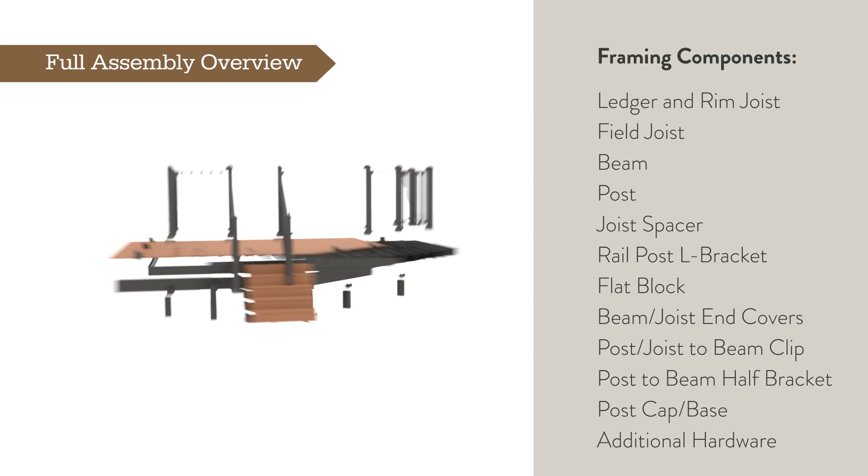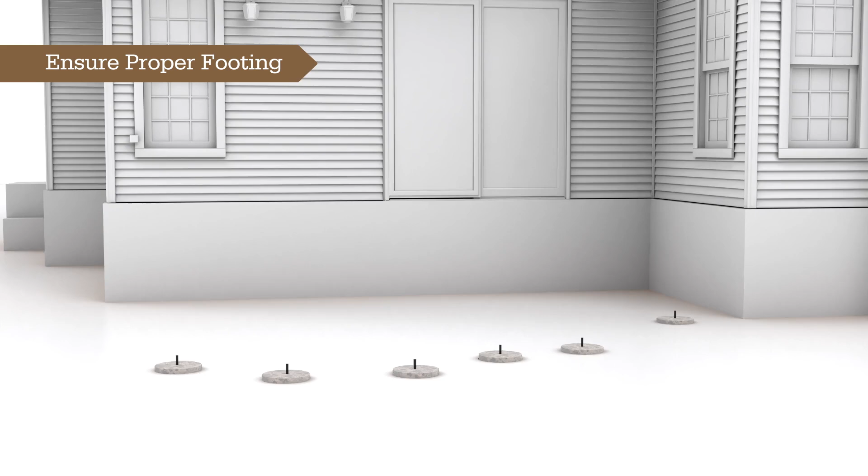A properly installed foundation footing system that is below frost line and meets local code requirements is critical to the appearance and performance of TimberTech framing and decking products. Depending on the deck height above grade, and especially in close-to-grade applications, excavation may be needed, including sloping the finished grade to shed water from the home and deck.

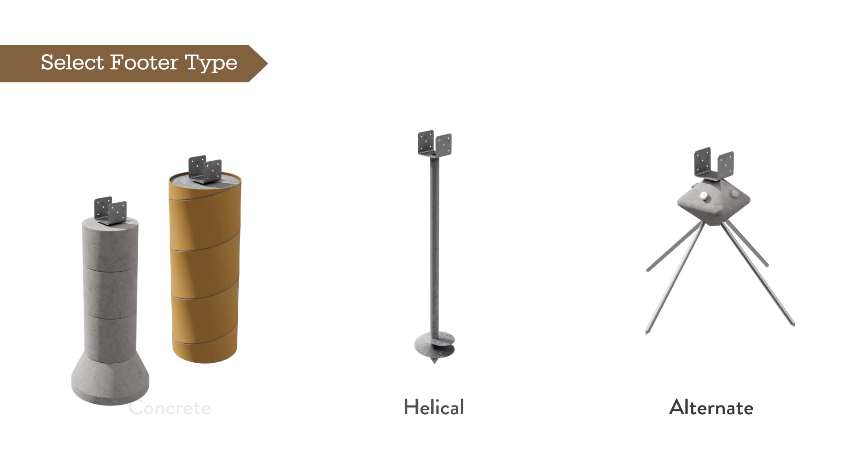Always check with local code authorities for specific footing requirements, including type, size, and depth requirements in your area. Examples of acceptable footing systems include poured concrete footings, precast stackable concrete, helical piles, and alternate type piers.

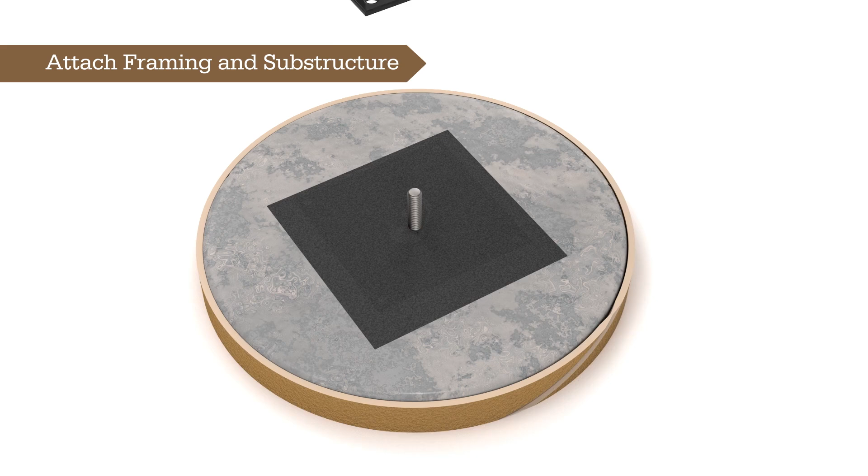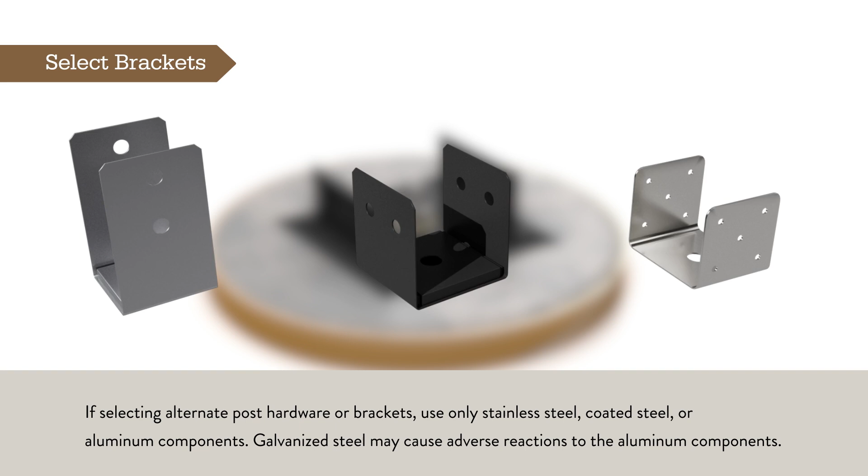Your deck frame or substructure must be securely attached to the foundation to prevent uplift, lateral movement, or shifting of the deck structure. While we do supply post-to-pier brackets, there are many types of connector brackets available on the market to securely attach framing to footings depending on type of footing used, load capacity needed, or other specific requirements.

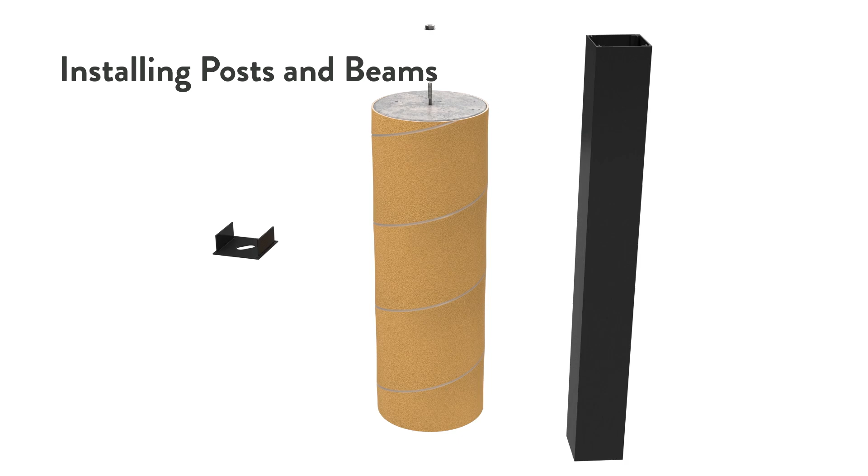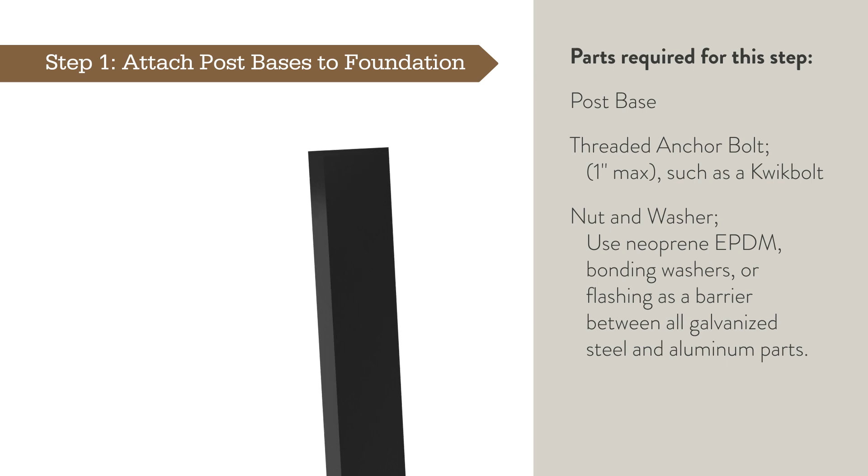Next, we will go over the steps you need to know to successfully install posts and beams for TimberTech aluminum framing. Step 1. Cut your post to the appropriate length, considering that the beam is 11 1/4 inches tall, joists are 7 1/4 inches tall, and composite decking is typically 1 inch tall. Be sure to consider the additional 1/4 inch total height that the post base and post cap will add to your post.

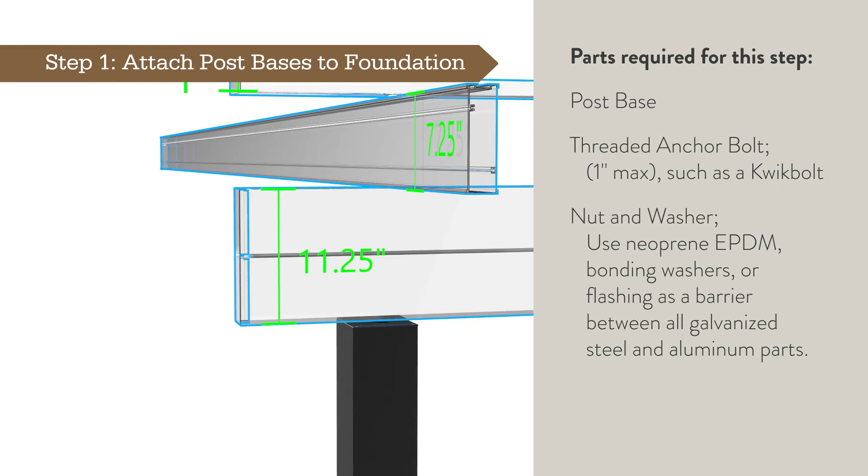Secure post bases to the pre-installed foundation or footing system using a threaded anchor bolt, washer, and nut. Be sure to install a galvanic barrier between any uncoated steel and aluminum contact points. Step 2. Insert post caps. Insert a post cap into each post and install 4 TimberTech AF flathead screws at each countersunk hole.

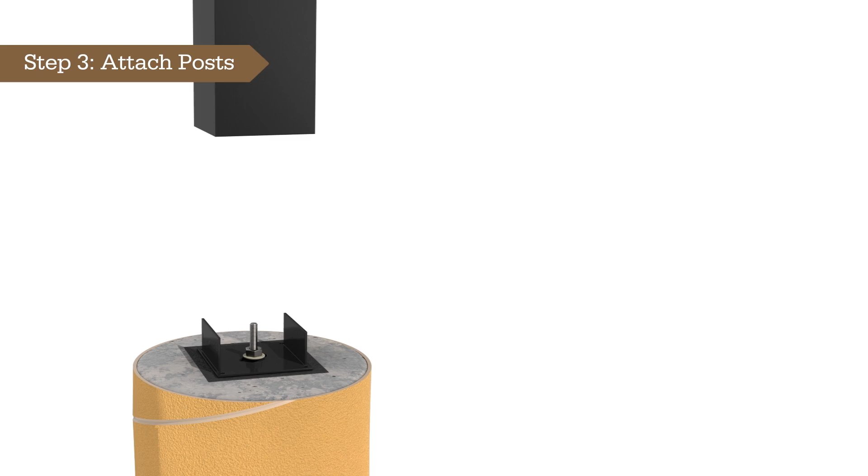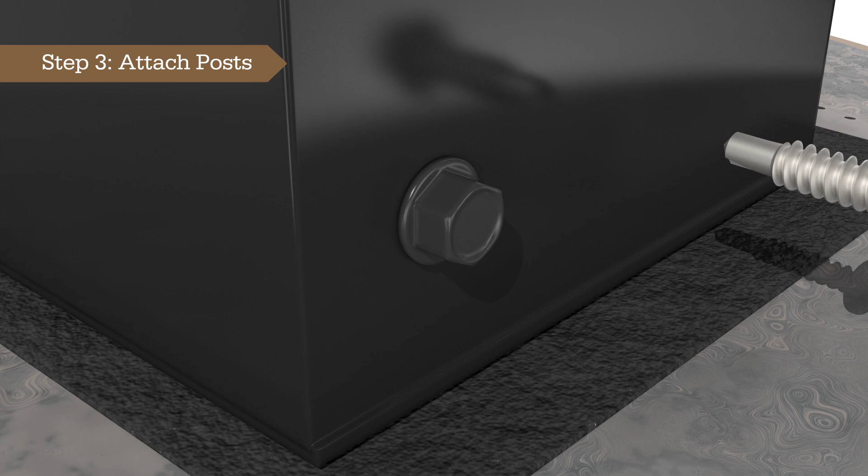Step 3. Attach 5.5 inch by 5.5 inch aluminum posts to each post base. Set each post by sliding the 2-inch post base tabs into the internal post slots. Use 6 TimberTech AF 1/4-20 hex head self-drilling screws to secure each post to the post base, ensuring the screws drill through the post wall and into the 2-inch post base tabs that are hidden inside the post. Check that all posts are level and plumb, making any necessary adjustments prior to proceeding.

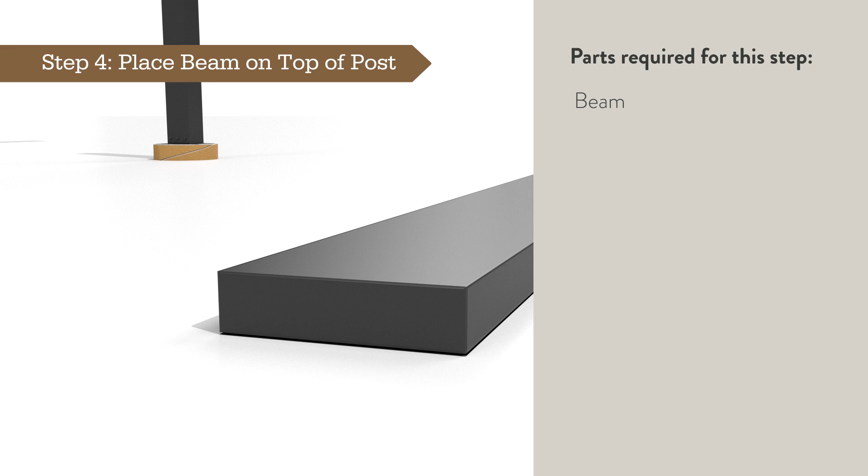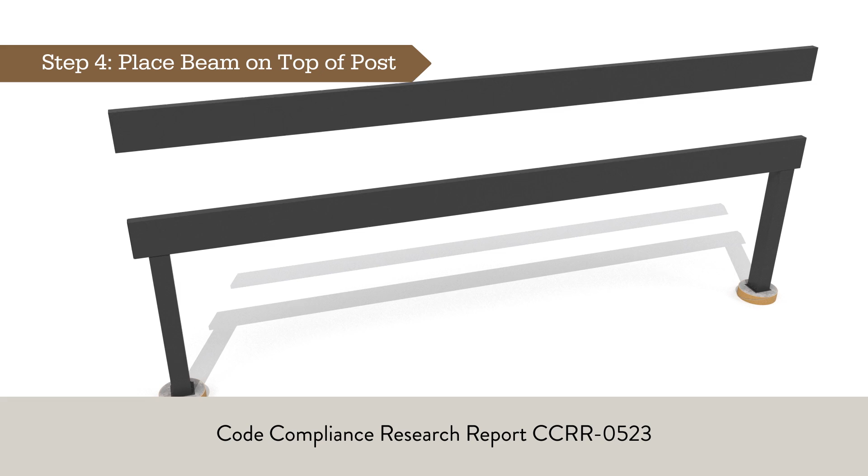Step 4. Place the beam on top of the posts. Carefully set the beam on top of the posts. At least 2 people are needed to safely hold the beam in place prior to fastening. 2 beams may be used to achieve greater spans between the posts. Refer to CCRR-0523 for allowable single beam and double beam spans.

Step 5. Install post-to-beam half brackets. Use TimberTech AF flathead screws to install post-to-beam half brackets on the front side of each beam and post. 2 screws drill into the front of the beam and 2 screws drill into the sides of the post. Ensure the front of the beam is flush with the front edge of the post. For double beam configurations, secure the second beam by installing a post-to-beam half bracket on the back side of the posts.

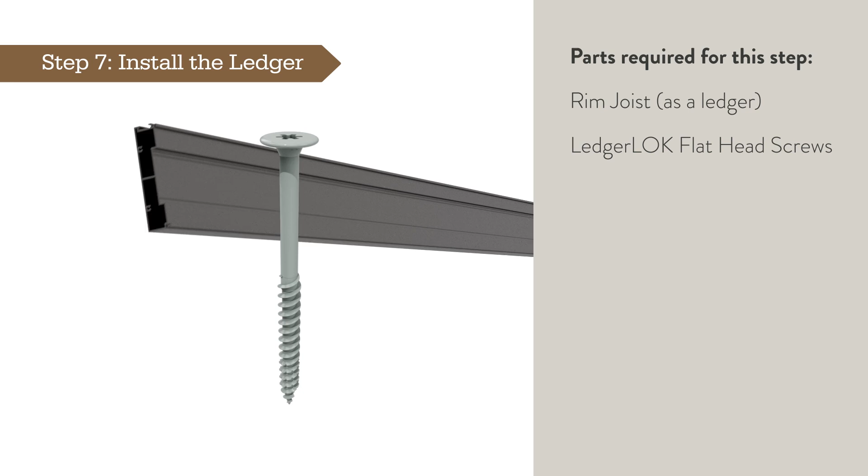Step 6. Install post-to-beam clips. For a single beam configuration, use TimberTech AF hex head screws to install a beam clip on the back side of each beam post connection. 2 screws drill into the post cap and 1 screw drills into the beam. Single beams may share a single post. If splicing a beam, center the splice on the post and install a beam clip on the back side of each beam.

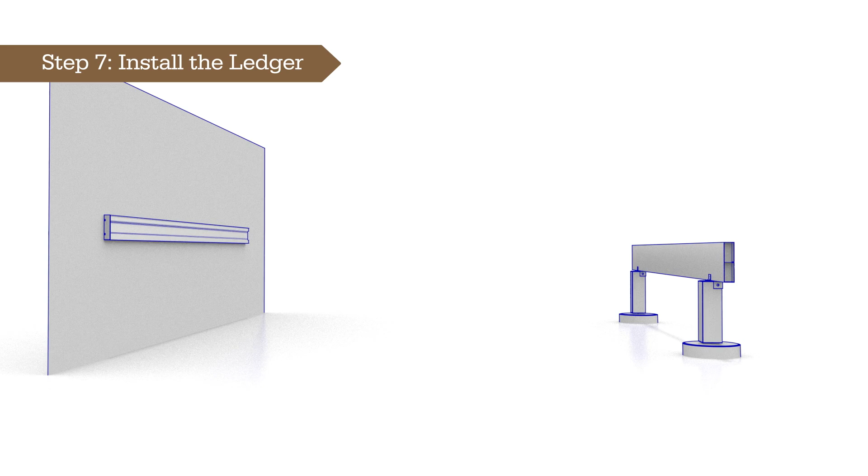Step 7. Install the ledger. Prior to installing the ledger, you must install a waterproofing membrane between the ledger and the house rim board. After the frame is installed, install an additional waterproofing membrane running from the house behind any siding and across the top of the ledger, so that all the water drains in front of the aluminum ledger. The ledger should be installed so that the bottom of the ledger is level and in the same plane as the top of the drop beam.

If your design calls for the frame to slope away from the house, raise the ledger so that the bottom sits slightly higher than the top of the beam. For flush beam installations, the top of the ledger will be in plane with the top of the beam. A slope away from the house can be achieved by slightly raising the ledger.

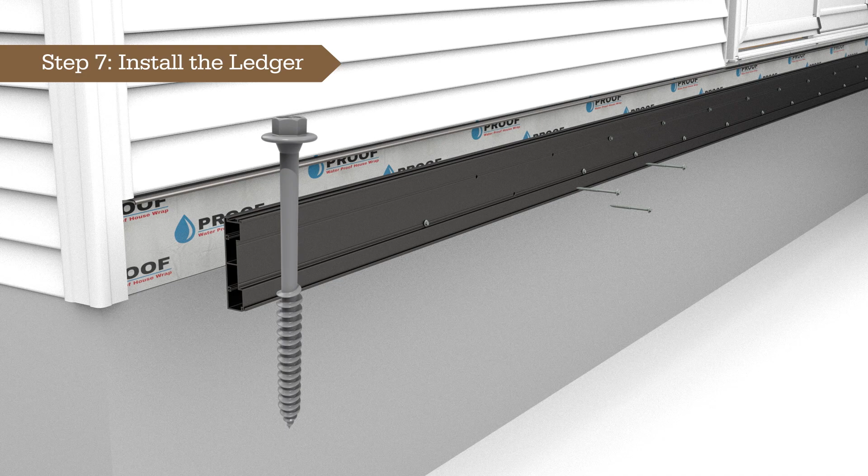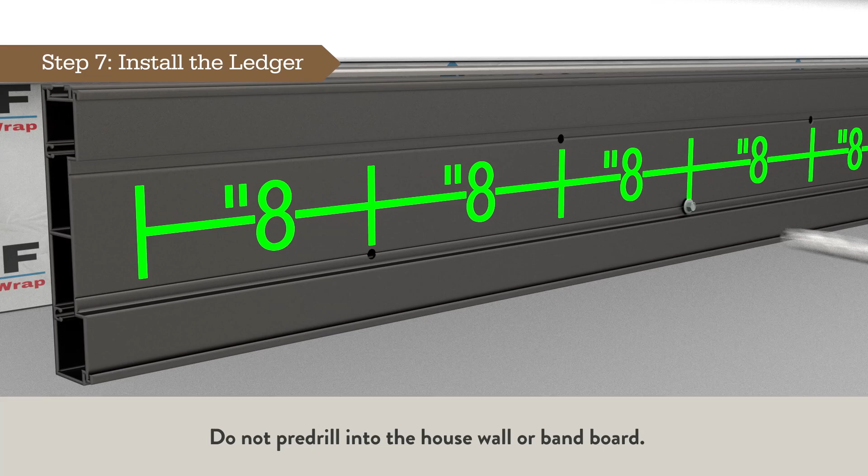You must pre-drill the ledger prior to installing ledger lock fasteners or other approved coated steel anchors. Pre-drill through both walls of the ledger with a 5/16 inch or 3/8 inch drill bit, using the V-notches on the ledger for vertical positioning.

Alternate ledger lock anchors every 8 inches, placing one high and one low across the ledger in a W pattern. Some instances may require 2 screws every 8 inches or a different fastening schedule. Refer to local building code and CCRR-0523 for proper spacing and placement of anchor screws.

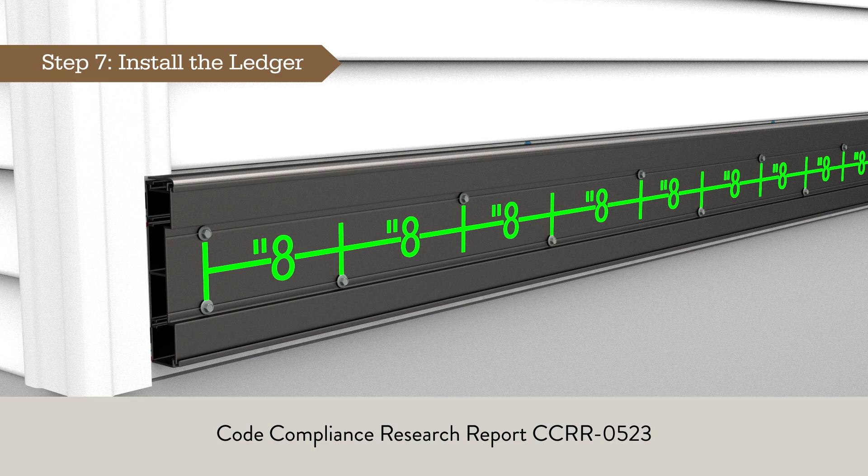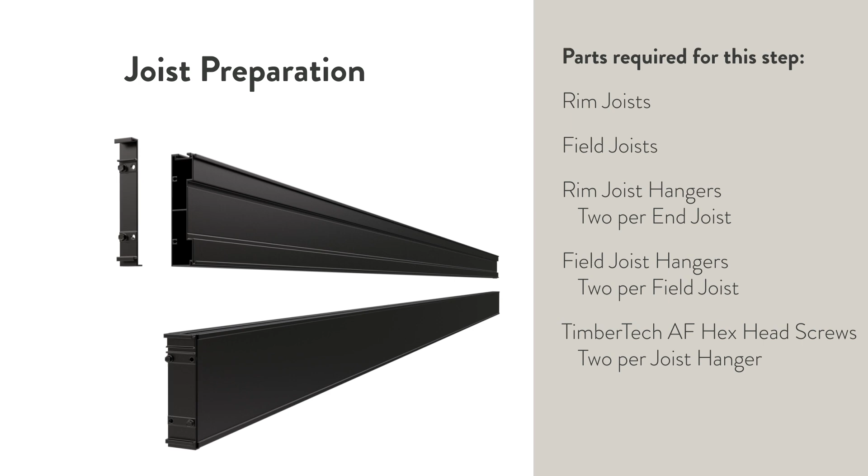Next, we will cover how to prepare and install joists for your TimberTech aluminum framing. You will need rim joists, field joists, rim joist hangers, field joist hangers, and screws. A standard rectangular deck frame requires 4 rim joist components to form the perimeter. The ledger and rim joist are usually cut to the overall frame width. The 2 end joists are cut to the same length as the field joists.

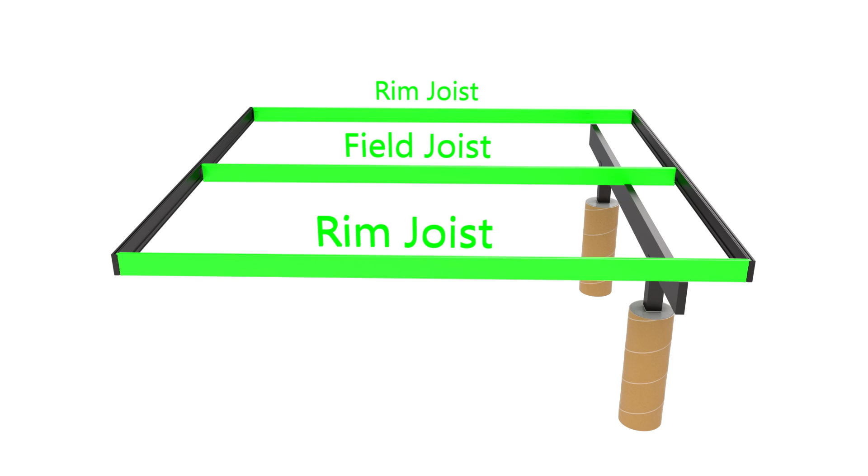The length of the field joists and end joists is determined by taking the overall frame length and subtracting 4 inches, 2 inches for the ledger with joist hangers and 2 inches for the rim joist with joist hangers.

Install rim joist hangers to every end joist and field joist hangers to every field joist, using a joist hanger and 2 TimberTech AF 1/4-20 hex head screws at each joist end. Ensure the 2 hooks are pointed down and that the top of each joist hanger is flush with the top side of the joist.

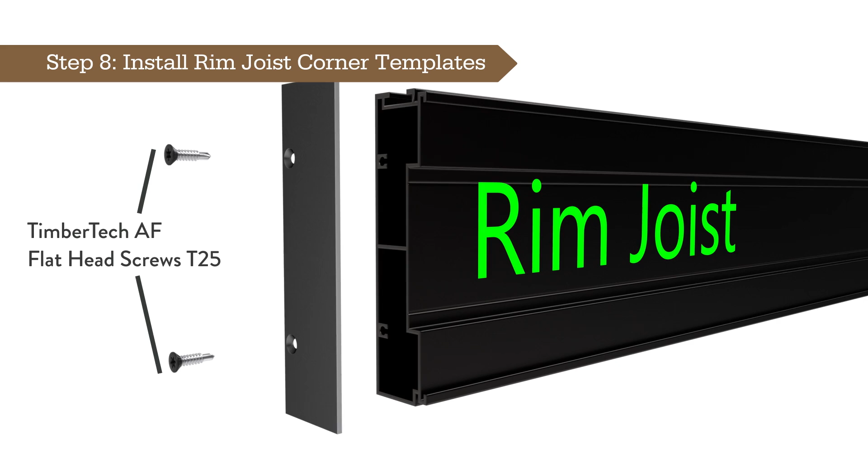Step 8. Install rim joist corner templates at the ends of the ledger and rim joist using 2 TimberTech AF flathead screws for each template. The corner templates can be removed or left in place after the installation is complete.

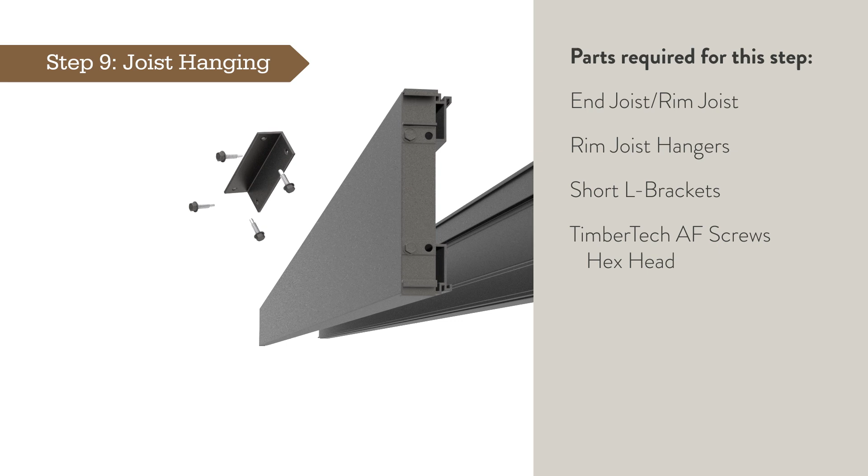Step 9. Install end joists. Hang the end joist between the ledger and rim joist, then secure each corner using 1 short L bracket and 4 TimberTech AF 1/4-20 hex head screws.

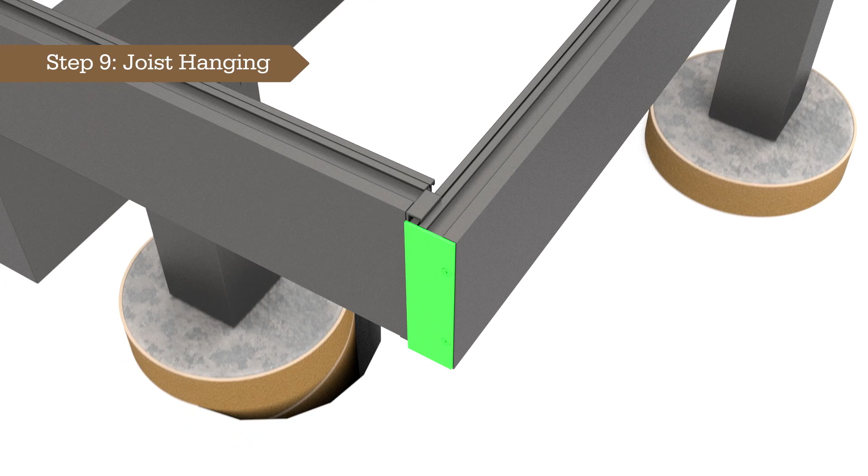Use the rim joist corner template as an alignment tool to ensure the end joists are installed perpendicular and flush with the ends of your ledger and rim joist. The end joist should have rim joist hangers installed prior to installing the short L bracket.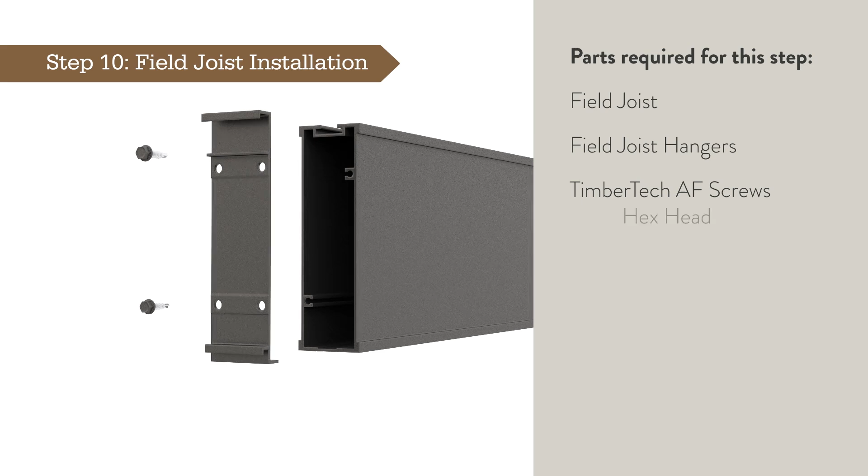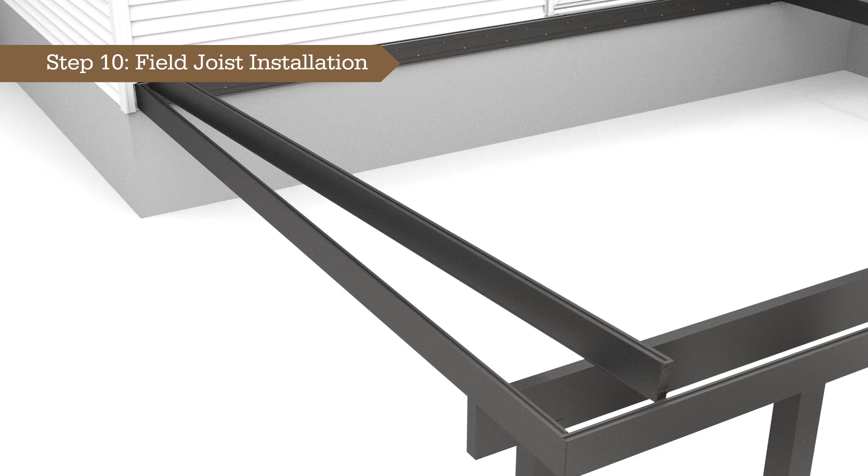Step 10. Hang field joists. Install field joists by hanging them on the ledger and rim joist. This may require rotating the joist about 10 degrees, lowering the joist so it is in plane with the perimeter frame, and then rotating back so the hangers latch on to the ledger and rim joist.

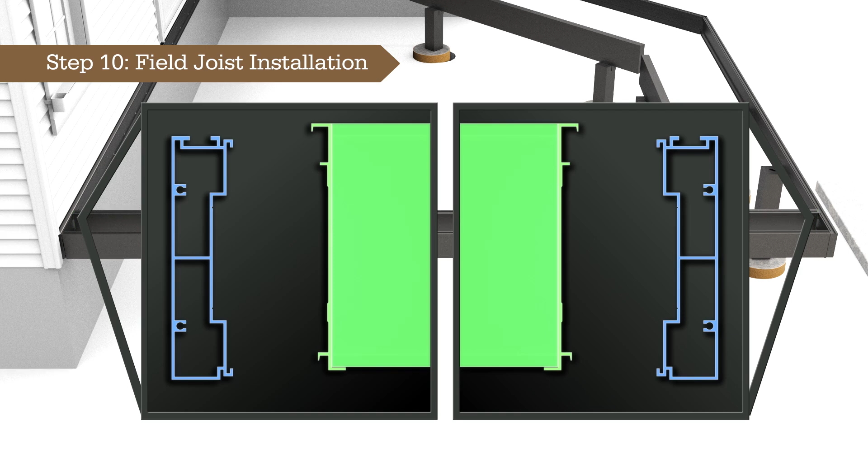Ensure that the top and bottom field joist hanger hooks are fully engaged with the ledger and rim joist. If the joist looks misaligned or out of plane, check that the field joist hanger is properly latched onto the top and bottom hooks on the ledger and rim joist.

Step 11. Install joist spacers and uplift keys. Hang a joist spacer on the ledger and rim joist to set the appropriate joist spacing. Then insert a 2-inch uplift key through the top opening of the joist hanger. This locks the field joist components to the rim joist and prevents vertical uplift forces.

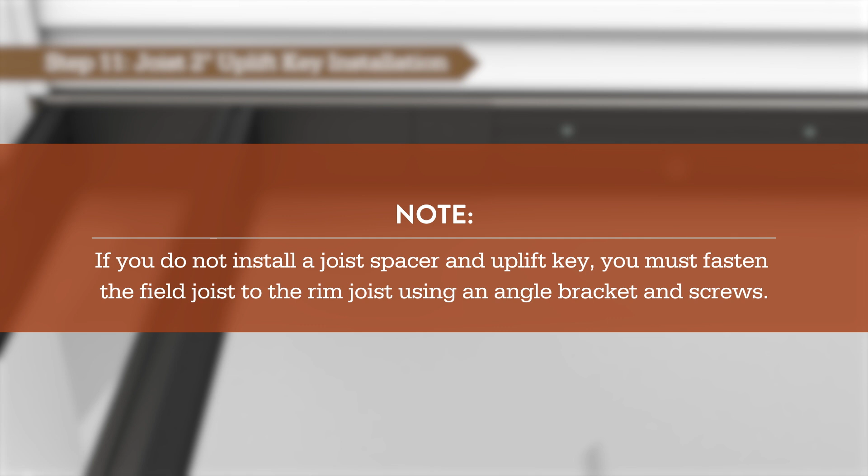It is critical to install a joist spacer on both sides of every joist, as the joist spacers lock in the uplift keys and prevent the joists from moving horizontally along the rim joist track. Joist spacers may be stacked, combined, or cut to smaller widths if the joist spacing is not standard 12-inch or 16-inch on center. If you do not install a joist spacer and uplift key, you must fasten the field joist to the rim joist using an angle bracket and screws.

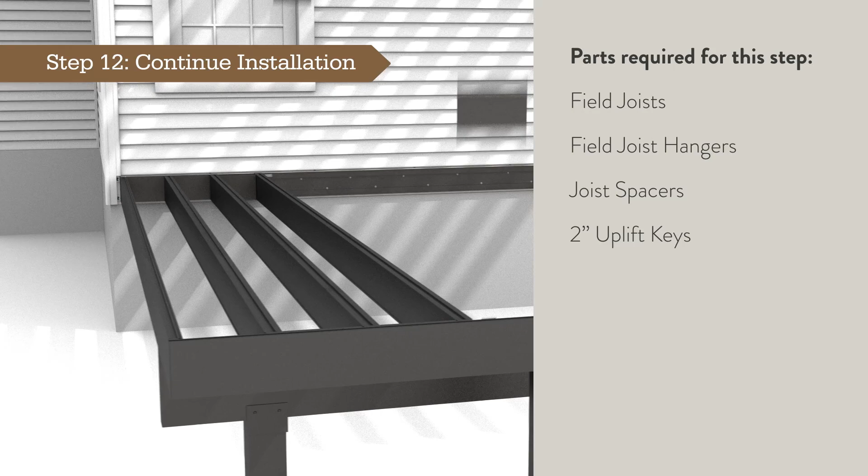For 12-inch on center, use 10-inch joist spacers. For 16-inch on center, use 14-inch joist spacers. Step 12. Continue the installation process. Repeat the previous joist hanging steps, installing field joists, uplift keys, and joist spacers until there is 1 joist remaining.

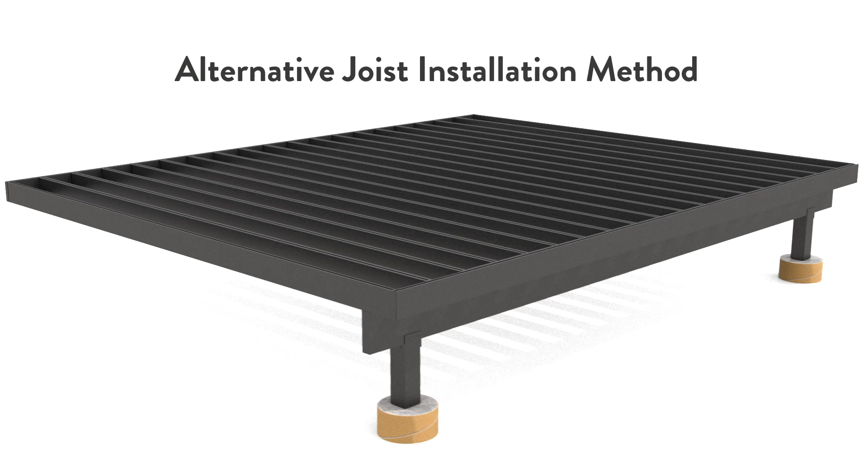An alternate method of installing joists is to use a tall L bracket and 4 TimberTech AF 1/4-20 hex head screws. This method does not require joist spacers and uplift clips.

One common installation practice is to use joist hangers, spacers, and uplift keys to hang joists on the ledger, and then fasten the joist to a flush beam using a tall 90-degree bracket and 4 TimberTech AF hex screws.

Install the last field joist and insert an uplift key. Then, measure the resulting gap between the last field joist and the end joist, accounting for the short L bracket in the corner, and cut your last spacer to the appropriate length. Alternatively, you can use a tall L bracket or short L bracket to secure the last field joist.

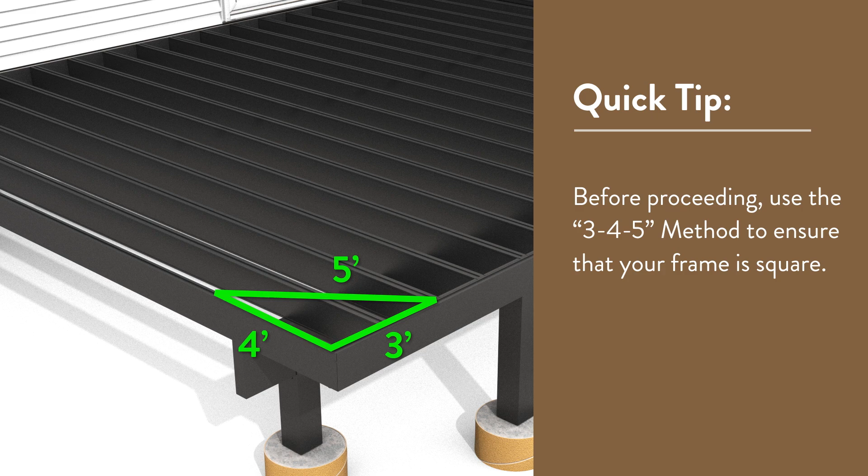In the case of a double beam, center the beam clip over the seam and fasten 1 hex screw into each beam. Step 14. Install optional fascia and rim joist covers. Open rim joist ends can be covered with a rim joist corner template or a rim joist end cover with adhesive caulk. Black is recommended.

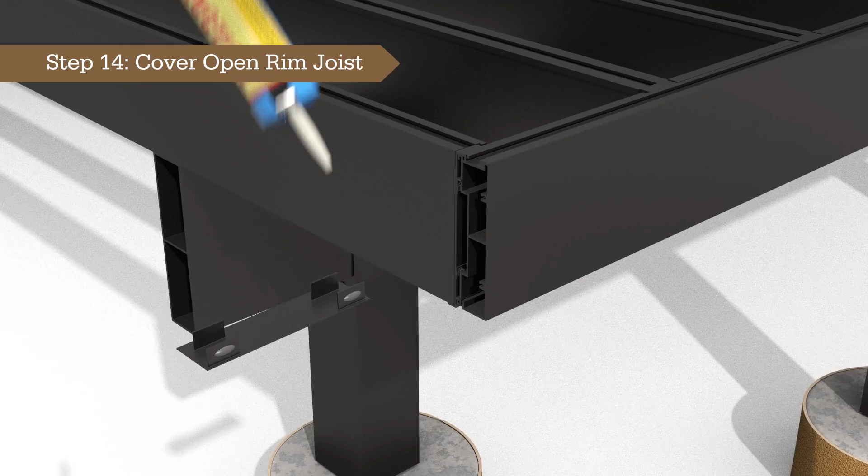The entire perimeter frame can be covered with a 7 1/4 inch PVC riser board or deck board or PVC trim, all of which can be fastened with Cortex driller screws and plugs. Composite fascia is not compatible with aluminum framing.

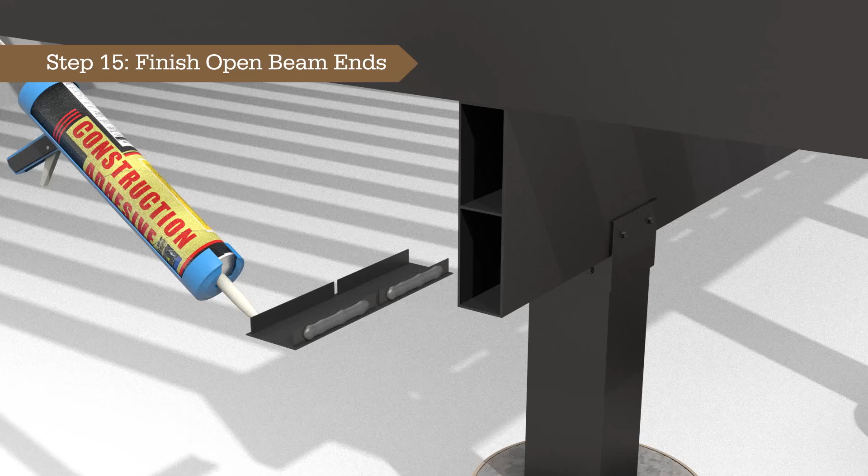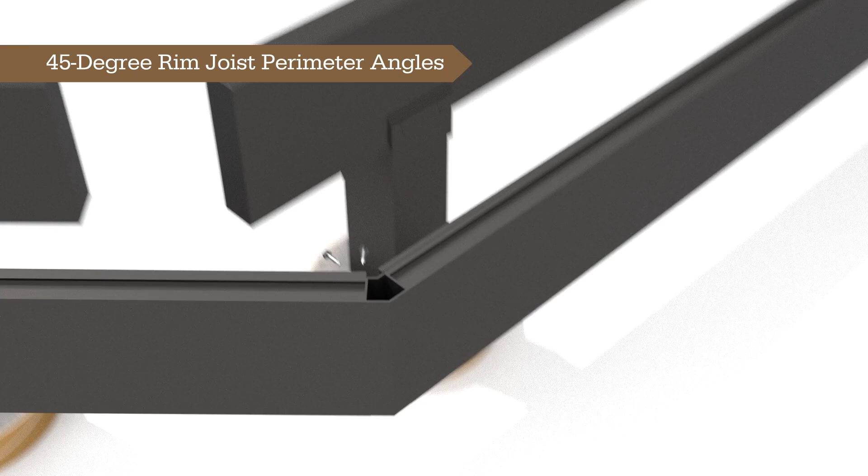Step 15. Finish open beam ends. The open beam ends can be covered with a beam cover using adhesive caulk. Black is recommended. When installing 45-degree rim joist perimeter angles using the 135-degree angle bracket, consider the following. Rim joists do not need to be miter cut, as the 135-degree angle bracket forms the 45-degree corner.

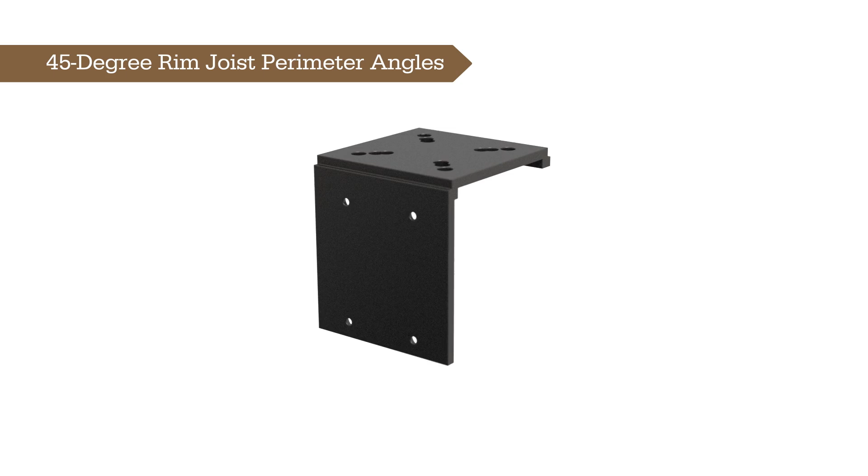When installing railing at the 45-degree corner, you may need to cut the rail post L bracket and drill new bolt holes so that the rail post can be installed at the correct angle. Refer to specific railing instructions for proper rail post placement at 45-degree corners.

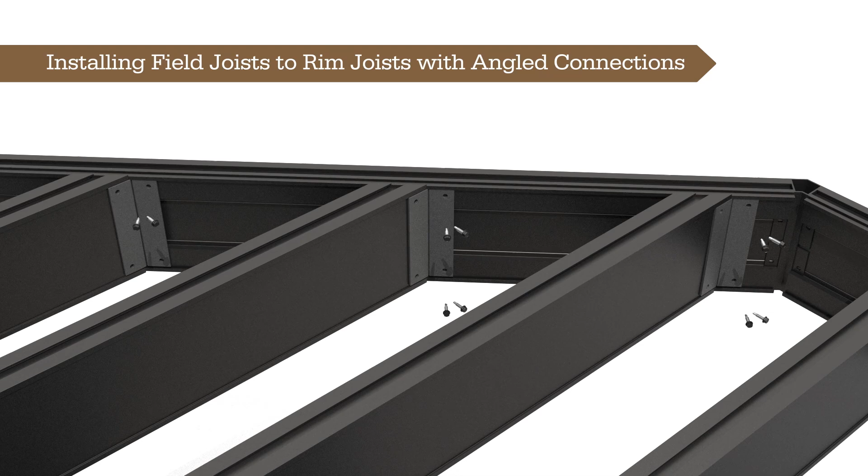When installing field joist to rim joist with angled connections using the adjustable angle bracket, the following tips should be applied. The adjustable angle bracket is a flat plate with a V-notch. Using vice grips, bend the bracket to the proper angle, but do not overbend or bend past 100 degrees. Only bend the bracket once. Bending the bracket back and forth will cause the bracket to break at the V-notch.

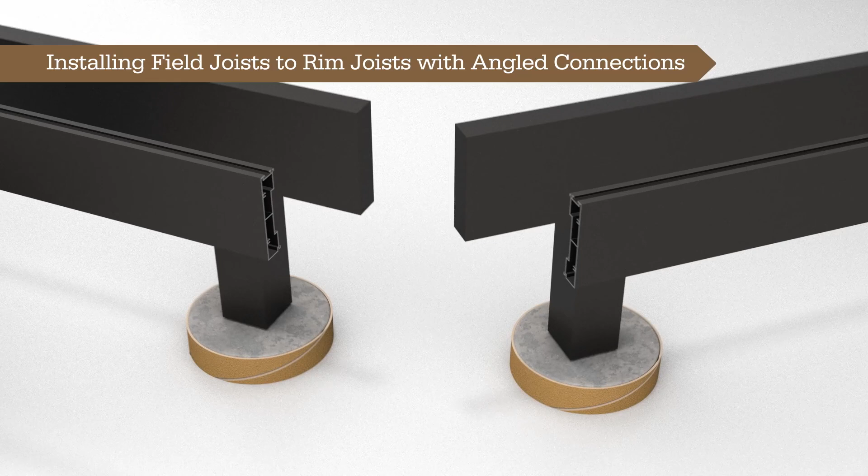When connecting field joist to rim joist at an angle, the field joist must be angle cut, and the adjustable angle can only be installed at the obtuse angle. When installing 2 rim joists with the adjustable angle brackets, you may want to angle both rim joists to create a mitered outside corner. There are a few ways to design your frame to support a picture frame deck border.

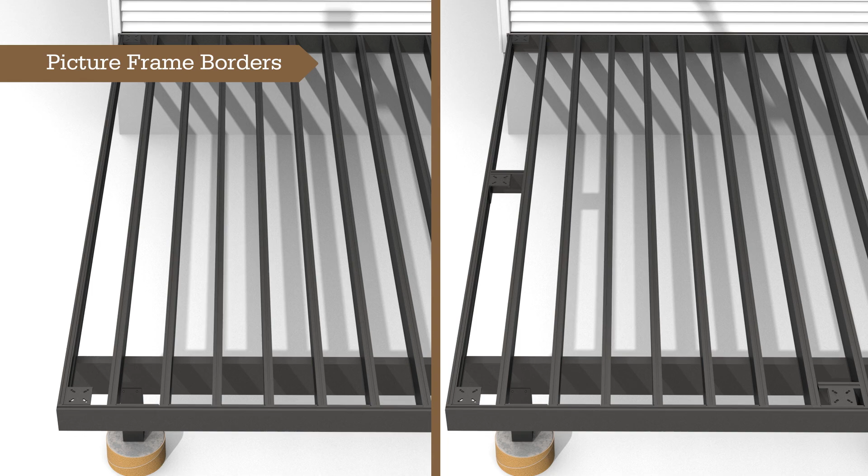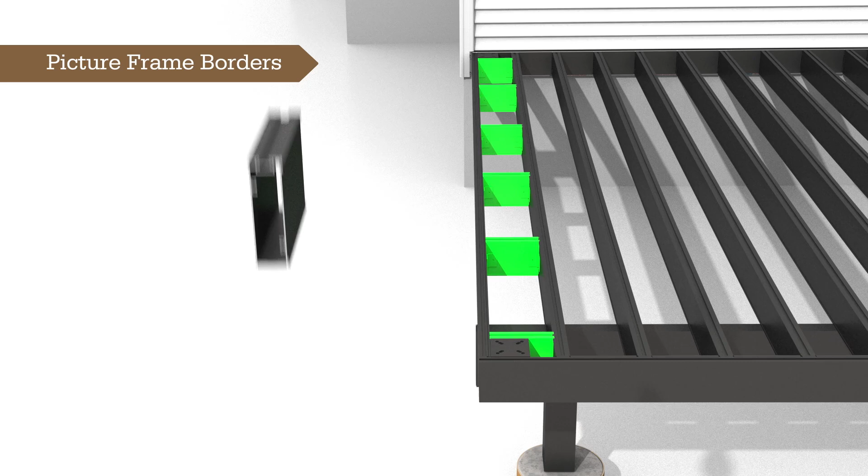A single picture frame border, or feature board, can be achieved using a sister joist, which may require rim joist blocking to design around your rail post L brackets as shown in this example. Alternatively, ladder blocking can be installed using cut field joist or rim joist sections and short 90-degree brackets. For double picture frame borders, you can install TimberTech flat blocks or use one of the suggested layouts in our install guide.

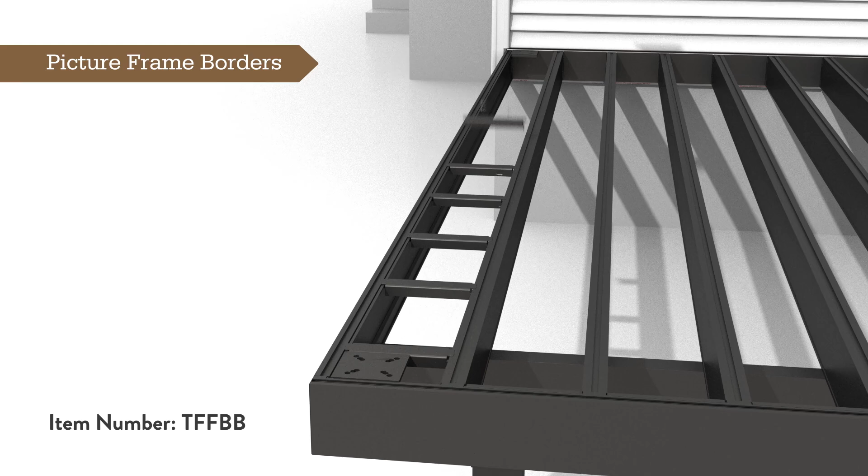With all of this in mind, you can now complete the installation of your TimberTech aluminum frame and begin installing your TimberTech deck. Please refer to our install guide, code compliance research report, and other installation videos for more details on stair framing, rail, and decking installation.